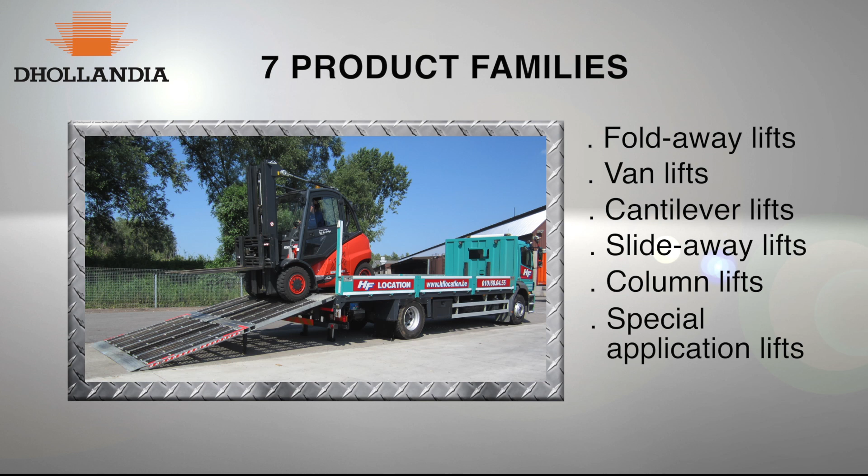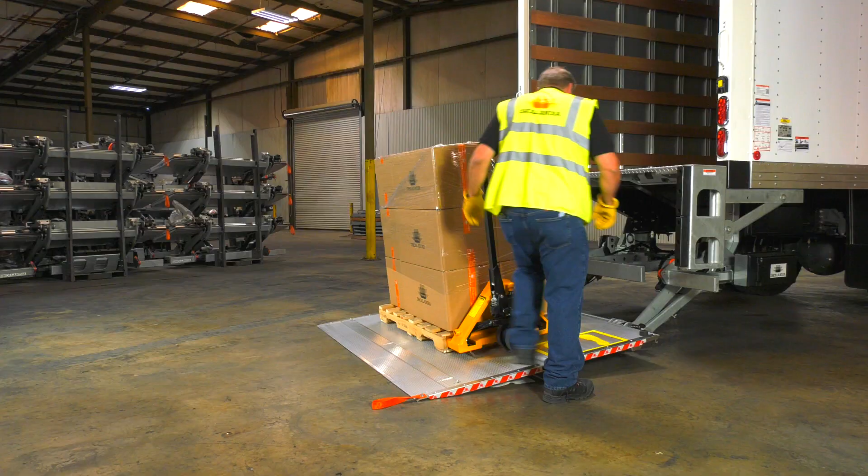This video addresses the fold-away lift type DHR with level ride and automatic tilt at ground level. The purpose of this video is to familiarize you with its main features, important safety precautions for liftgate operation, and the correct operation procedures. The presentation is broken down into 3 parts.

Section 1, introduction of the DHR and its main features. Section 2, important safety issues to be considered before and during use of the liftgate. And Section 3, correct operation of the DHR.

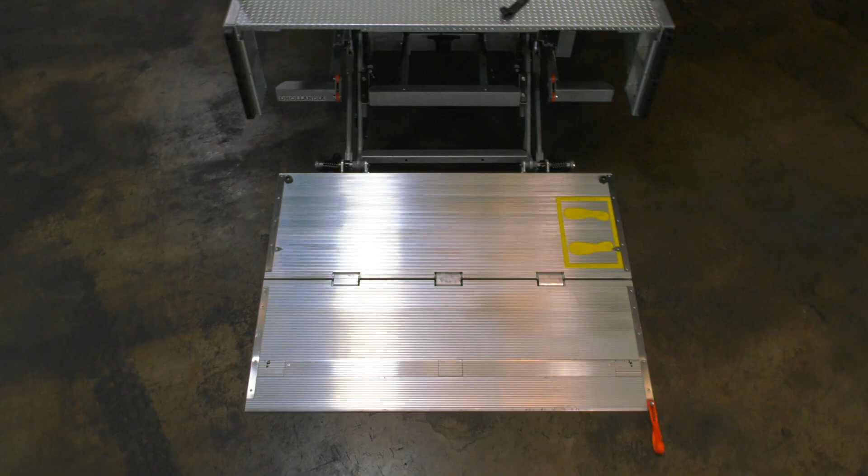DHR fold-away liftgates feature a folding, 2-piece platform consisting of a steel or aluminum platform main section and a lightweight aluminum flip-over part. In travel position, this foldable platform is safely stowed underneath the vehicle body. Upon deployment, the platform and lifting mechanism are lowered to the ground by means of the electric controls. Then the platform main section and flip-over part are unfolded manually.

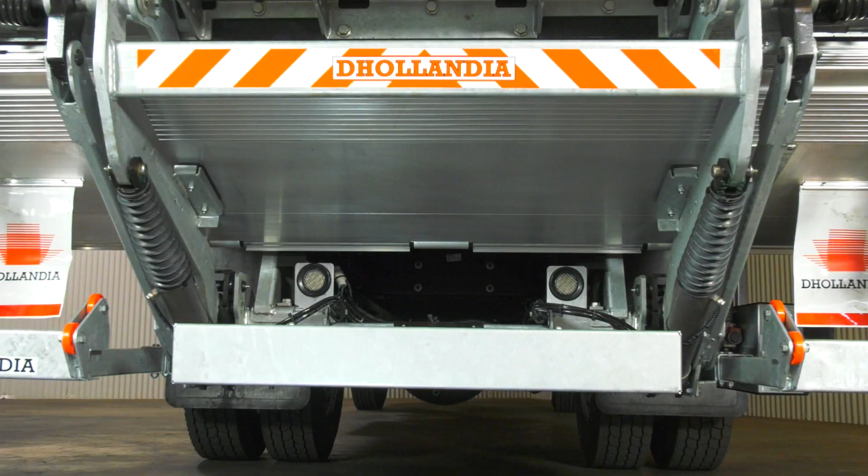Fold-away lifts can be installed in 2 ways: 1, flush with the rear sill of the vehicle body, or 2, under a bed extension plate equipped with side steps and dock bumpers.

The platform is moved up and down by heavy-duty lift arms, 1 or 2 hydraulic lift cylinders, and 2 parallel arms. They are mounted to a main lift frame that attaches to the vehicle chassis by means of a pair of mounting plates. Liftgates type DHRC are equipped with 1 centrally mounted lift cylinder.

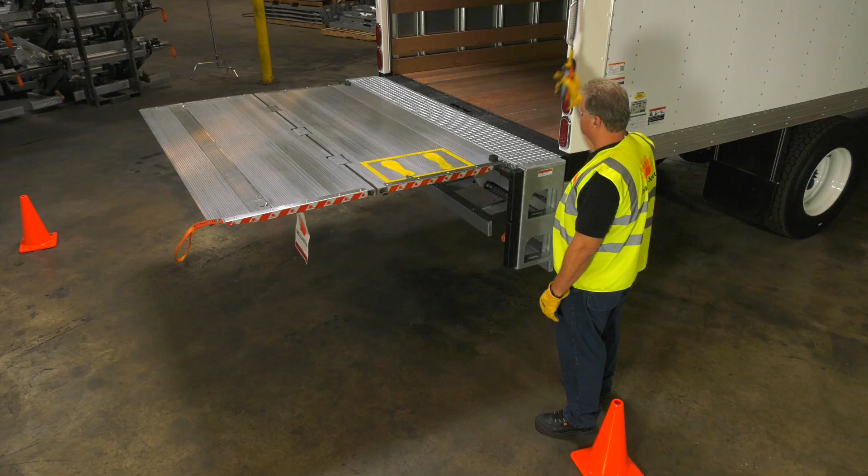Liftgates type DHRM have 2 lift cylinders mounted on the left and right side of the chassis rails. Depending on options chosen, the descend can be gravity down or power down.

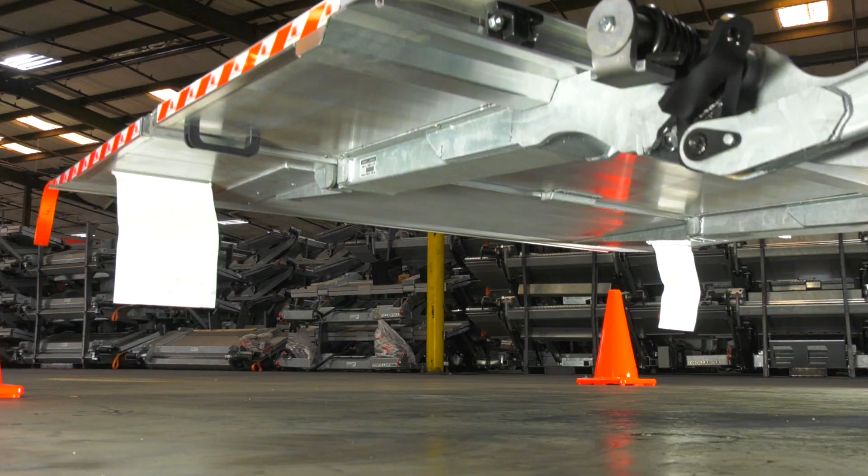The DHR are designed as level ride platforms with a repeatable auto tilt function at ground level. When the platform goes down and arrives at the ground, it will tilt down automatically as the operator continues to press the down button. When pressing the up button to lift the platform off the ground, it will first tilt itself up to the level ride position. Then the platform will continue to lift level ride to the vehicle floor.

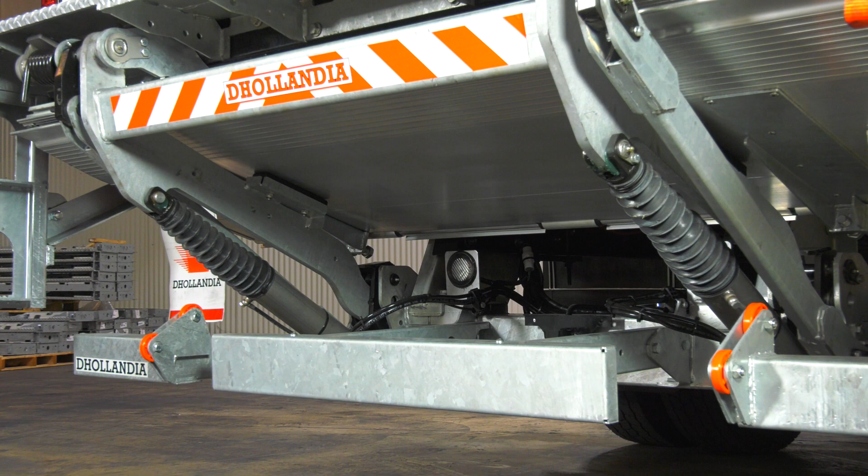Now have a closer look at the hydraulic cylinders. Each of the lift cylinders is equipped with automatic safety lock valves that automatically unlock and lock as the electric controls are activated or released.

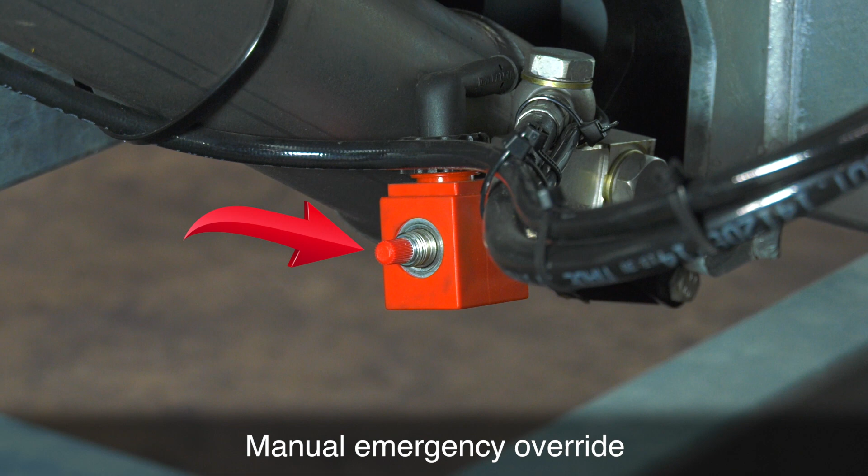The lock valves used on Dhollandia liftgates feature a manual emergency override so that they can be operated in case of electrical failure. Consult the operation manual before using this feature.

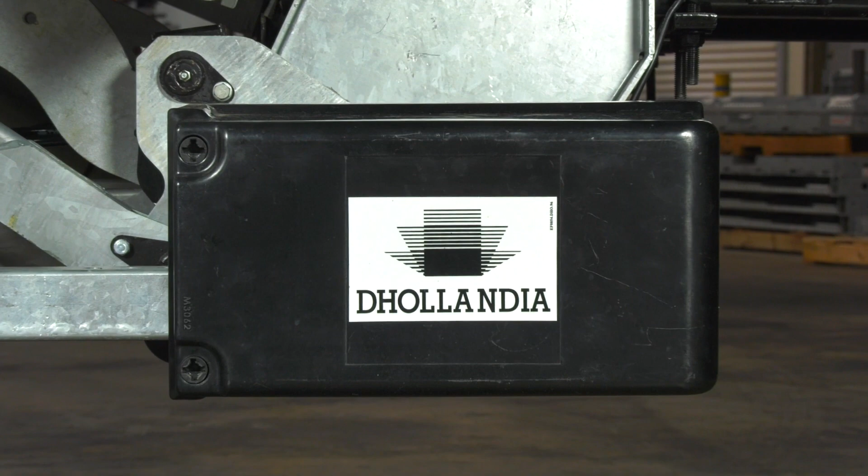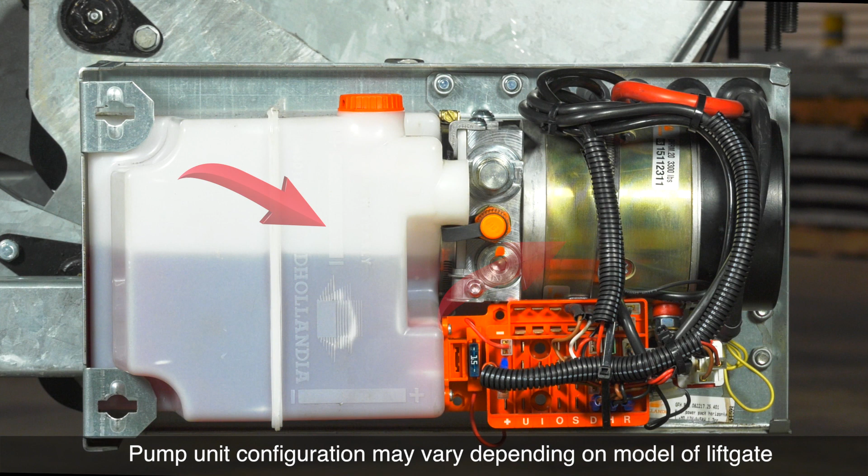The cylinders are driven by hydraulic pressure generated by the pump unit, generally pre-mounted at the side of the main lift frame. Inside, you will find a starter solenoid, electric motor, hydraulic pump, oil reservoir, and a wiring block connecting the whole system. For liftgates with optional power down function, an additional 4-way valve is mounted at the back of the pump unit.

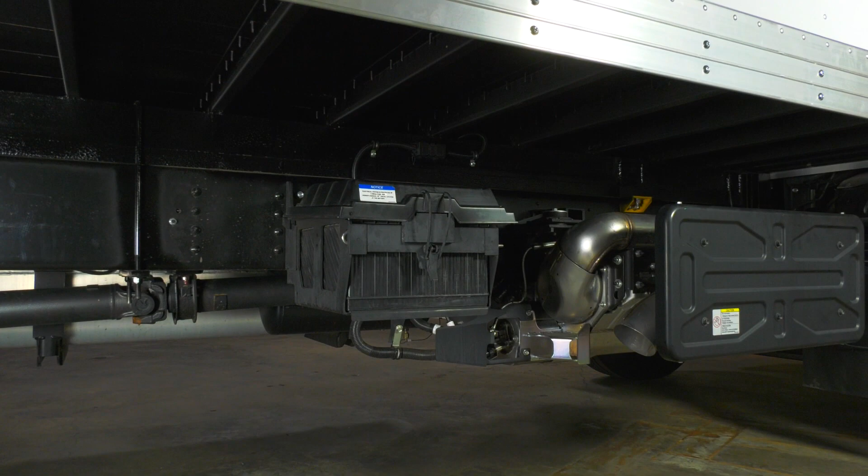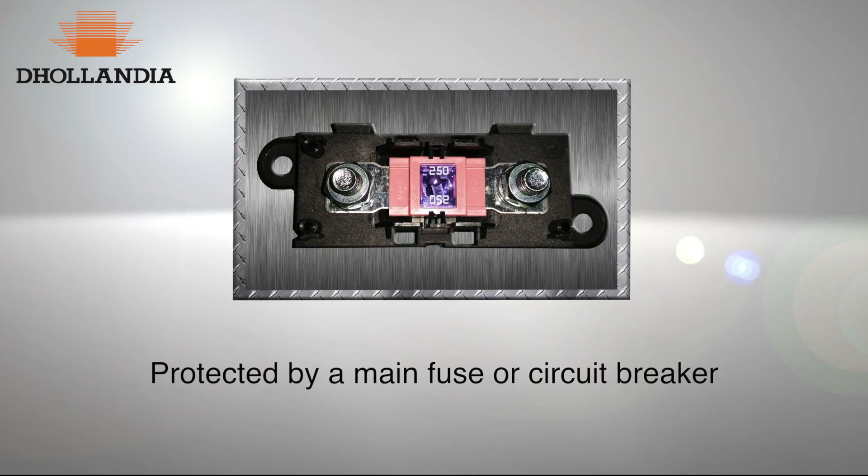The electric motor is fed by the truck batteries or an auxiliary battery pack charged by the alternator of the truck or tractor unit. The power cable from these batteries to the pump unit is protected by a main fuse or circuit breaker. These can cut out if the liftgate is run too many cycles without recharging the battery. It is harmful for any brand or type of liftgate to run on insufficient battery power.

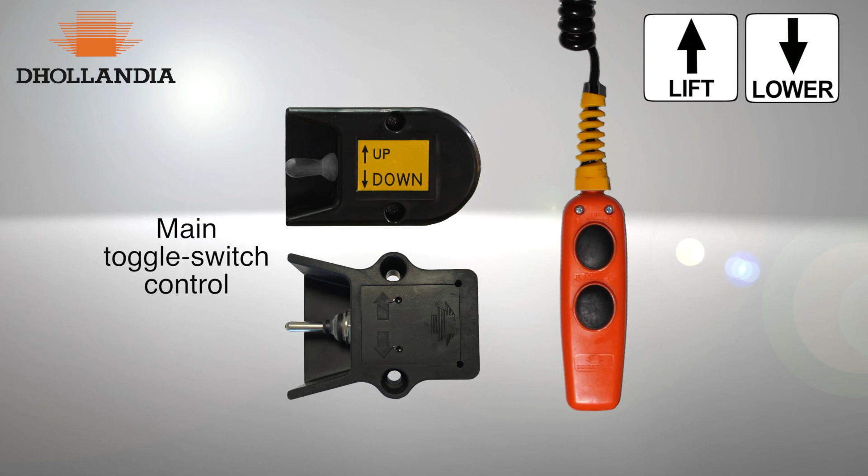Most liftgates are equipped with a main toggle switch control and auxiliary controls. The main toggle switch control is usually mounted here, on the side of the vehicle body, or here, on the vertical post of the vehicle body. When mounted on the side, it should only be accessed when standing on the ground.

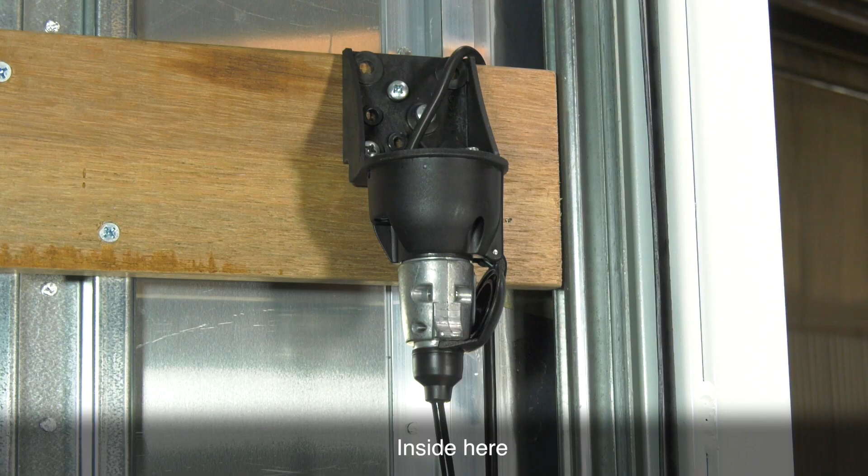The most popular auxiliary controls include a handheld control with spiral cable plugged in here, or foot controls mounted in the platform surface. All controls are powered by a cutoff switch mounted in the vehicle cabin. This cabin switch is activated by pressing the red button like this. A warning light indicates that power to the lift is switched on. It is shut off by pressing the button again like this.

Other popular options include automatic or manually operated cart stops, which prevent wheeled goods from rolling off the outboard platform edge.

All Dhollandia lift gates are supplied with an operation manual. This manual should be kept with your vehicle. All manuals can be downloaded from www.dhollandia.com. Additional paper copies can be ordered from Dhollandia via the relevant area number.

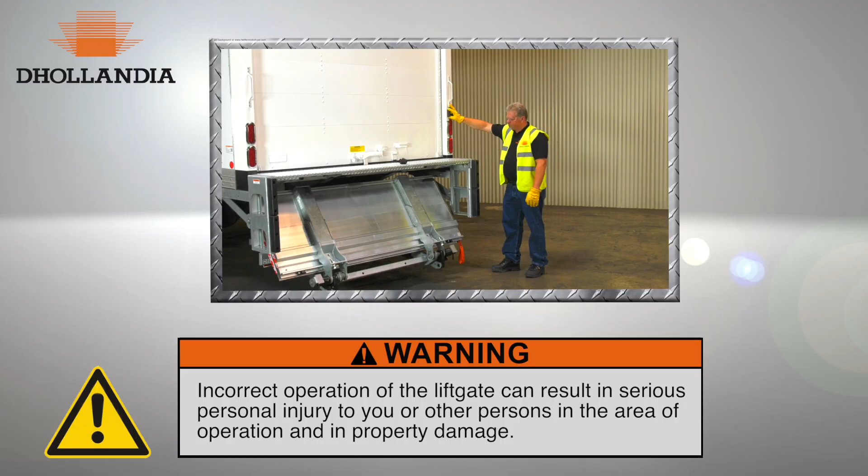This video is just a quick start guide to proper and safe work procedures. It is essential that you read and fully understand the operation manual and its safety precautions before operating the liftgate. Incorrect operation of the liftgate can result in serious personal injury to you or other persons in the area of operation and in property damage. It is your responsibility to ensure you comply with all warnings and operating instructions in the operation manual.

Never allow untrained or unauthorized persons to operate the liftgate. Dhollandia recommends you wear professional safety toe footwear with a good non-slip sole, protective gloves, and eye protection.

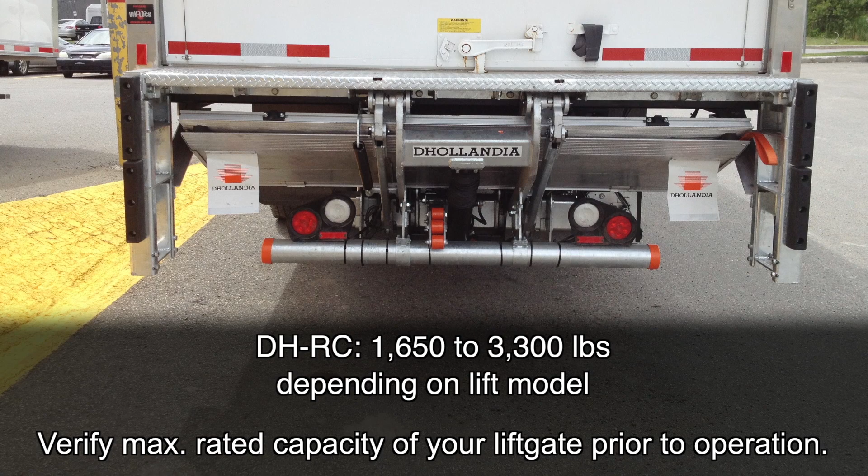Depending on the lift model, Dhollandia offers 1,650 to 3,300 pounds maximum rated capacity on the DH-RC with one lift cylinder, and 2,200 to 5,500 pounds maximum rated capacity on the DHRM with two lift cylinders.

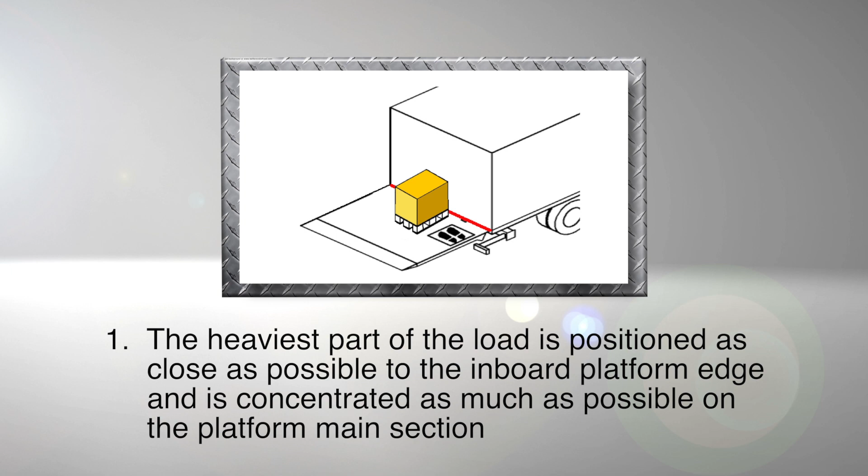This value is the maximum load you are allowed to put on the platform under the following two conditions: the heaviest part of the load is positioned as close as possible to the inboard platform edge and is concentrated as much as possible on the platform main section, and the load is centered between the lift arms.

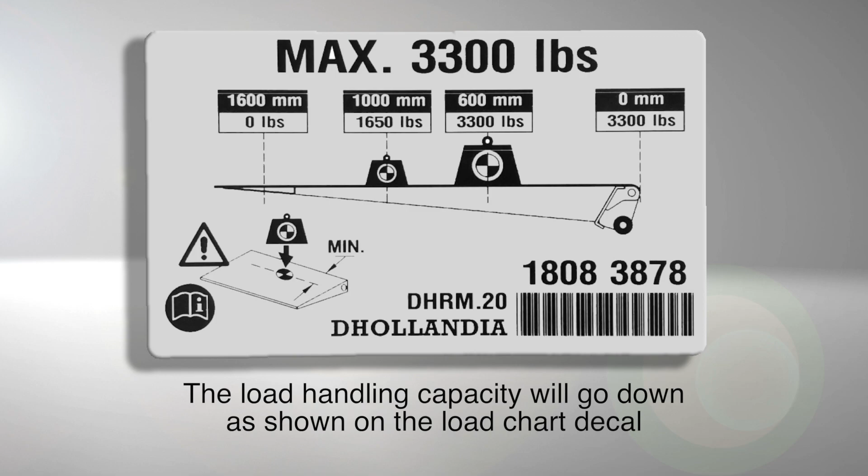If you place the load further away from the rear of the vehicle or out of center, the load handling capacity will go down as shown on the load chart decal. There are marks on the platform here and here to indicate where the center point of maximum load and area of greatest strength is located.

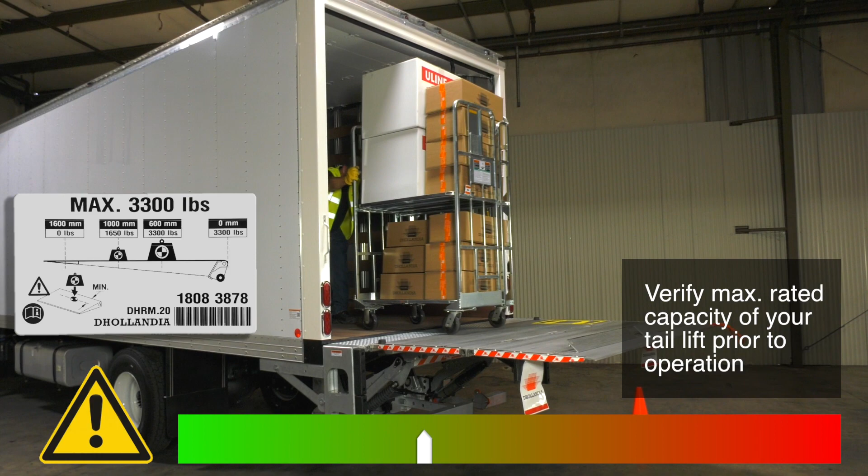Never place a load on the platform that exceeds the rated capacity and load charts. Overloading can damage the liftgate and cause severe personal injury to the operator and other persons in the working area. The load should never protrude beyond the outboard edge or side edges of the platform.

Forklifts are a frequent source of accidents and severe damage. When loading or unloading the vehicle by forklift, keep the platform safely stowed under the vehicle chassis. Never drive a forklift onto the platform.

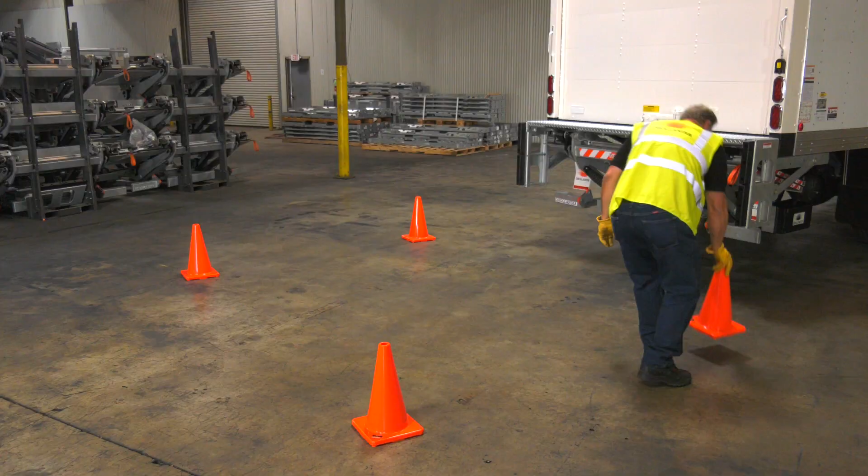Check that the work area is clear and make sure the liftgate can be used safely. Keep visual control over the whole work area at all times. It is good practice to place safety cones at the corners of the work area.

Don't allow any other person near the liftgate or its platform while it is in use. Optional platform flags can help make the liftgate more visible to other persons. Be prepared to guide other persons away from your work area.

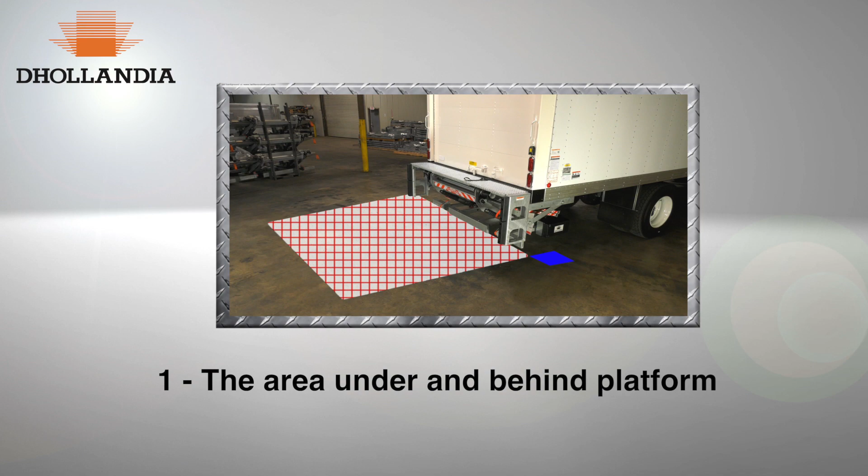There are 4 main danger zones that must be avoided at all times. First, the area under and behind the platform. Stay clear of the range of motion of the platform and the moving parts of the liftgate at all times.

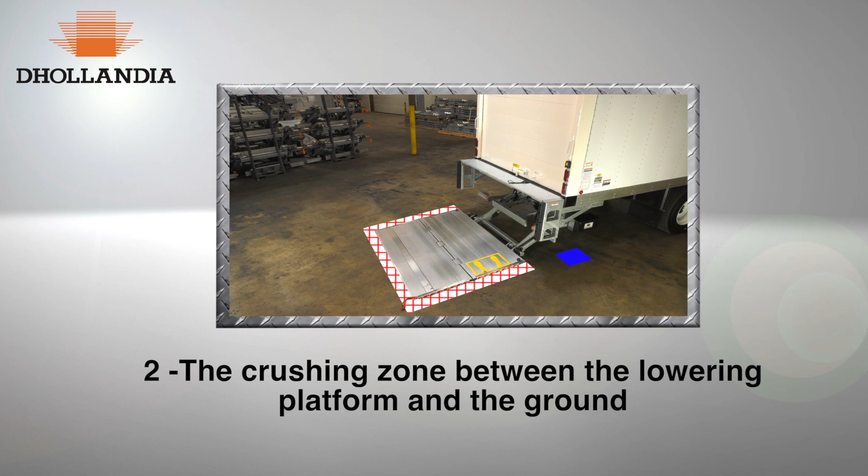Second, the crushing zone between the lowering platform and the ground. Stand at a safe distance on the side of the vehicle while operating the liftgate from the ground.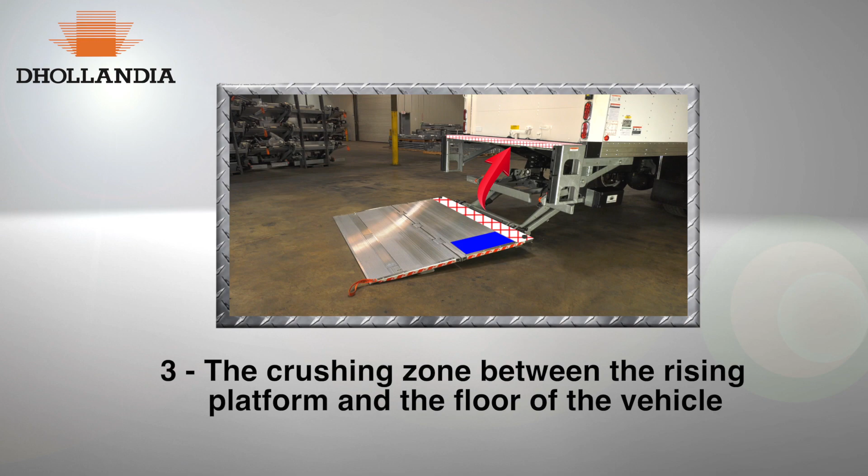Third, the crushing zone between the rising platform and the floor of the vehicle. Keep your feet at a safe distance of minimum 10 inches away from the inboard platform edge.

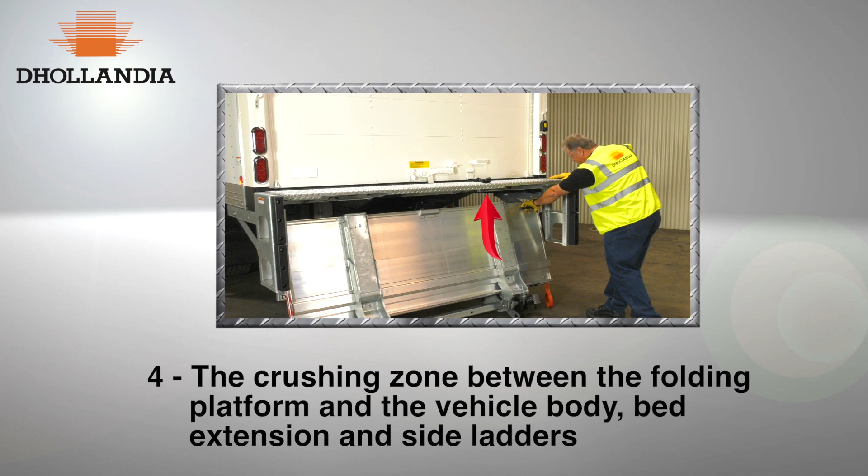Fourth, while manually folding and unfolding the platform, beware of the crushing zone between the platform and vehicle body, the inside faces of the bed extension and side ladders.

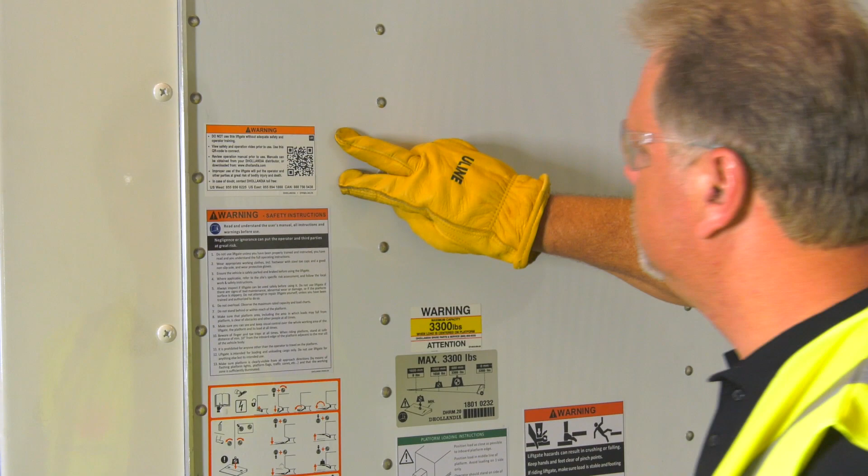Important decals are affixed near the main toggle switch control. Make sure that you fully understand and comply with these warnings prior to operating the liftgate, and keep them clean and legible at all times.

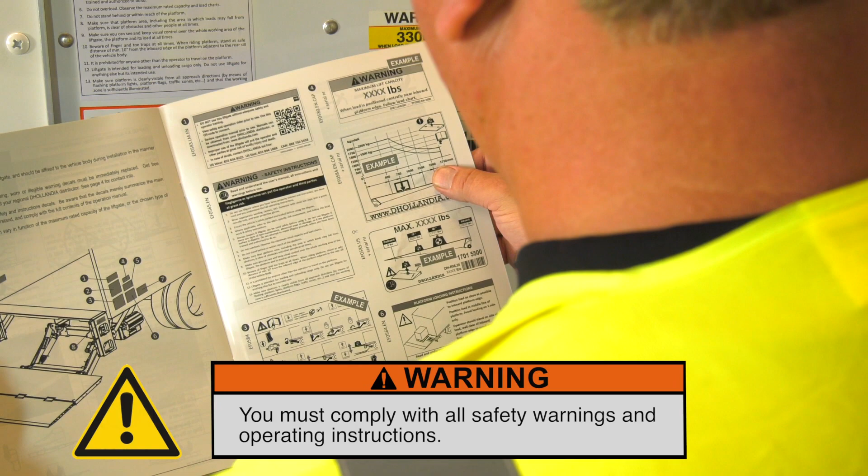Replacement decals and manuals can be obtained from Dhollandia via the relevant part number. You must comply with all safety warnings and operating instructions. Failure to do so can result in injury to you and others in the area of operation.

An extended platform is a potential hazard for people or vehicles passing by. Always make sure the liftgate is fully stowed whenever it is not in use. And before moving your vehicle, first stow the platform in its travel position.

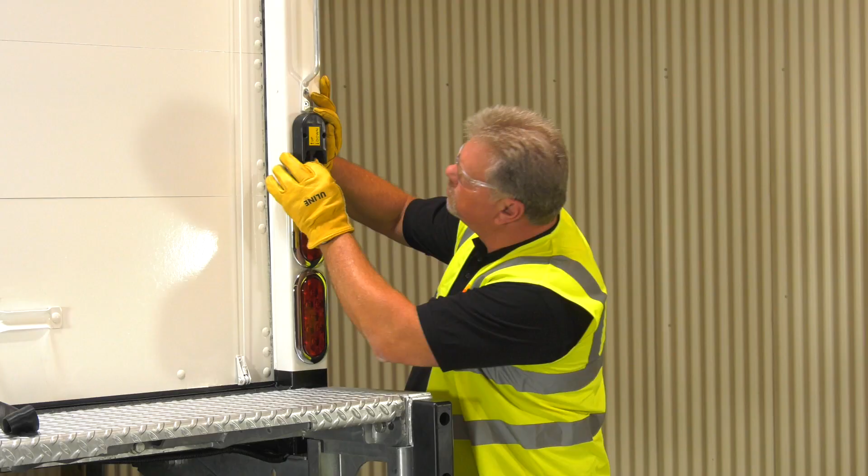Before operating your liftgate, there are some daily checks that must be performed. Begin your inspection at the main toggle switch control. Check the overall condition of the control box and its switch, and verify if the switch swiftly returns to the neutral position after releasing it.

Make sure the cabin switch switches the electric power on and off according to the set position. Check the overall condition of the auxiliary controls and their switches. In case of a handheld control, inspect the spiral cable.

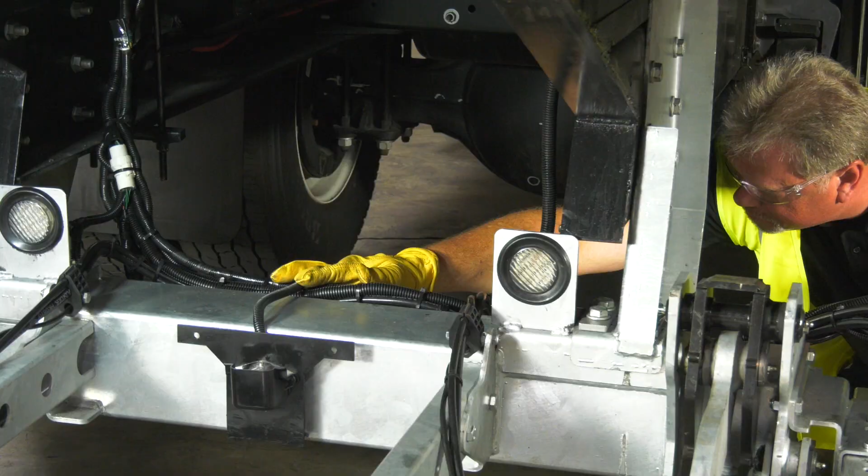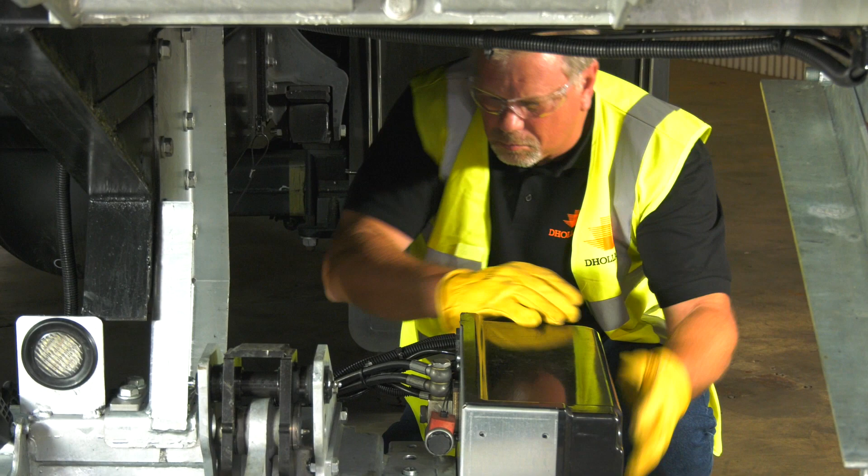Next, check the overall condition of the cabling to the pump unit. Make sure the looms and cables are not chafed or damaged. Check that the cover of the pump unit is properly mounted and secured, and look for visible oil leaks. Visually check all cylinders, their valves and fittings for visible oil leaks.

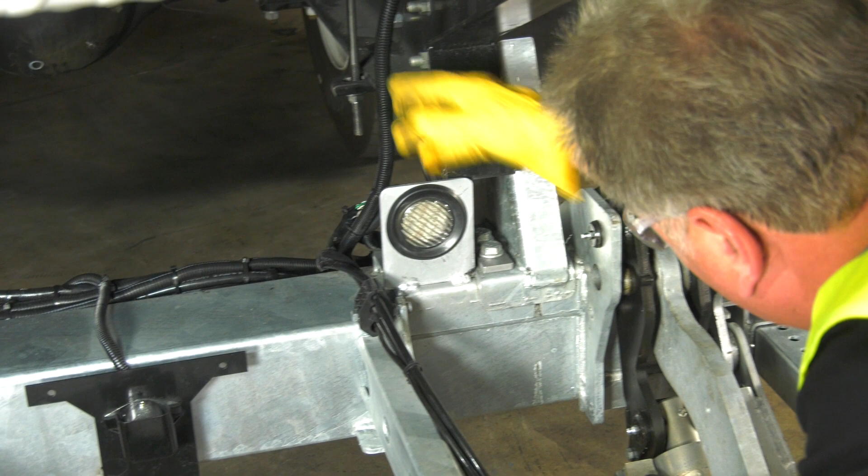Follow the hydraulic pipes and fittings to the pump unit. Make sure all wires and hydraulic pipes are undamaged and secured with cable ties. Check for visible oil leaks.

Visually inspect the general condition of the lift arms, lift frame, and its mounting plates to the vehicle chassis. Look for deformation, cracks in the material or welds, and proper locking of the pivoting pins. Ensure all bolts for the mounting plates to the vehicle chassis are fastened.

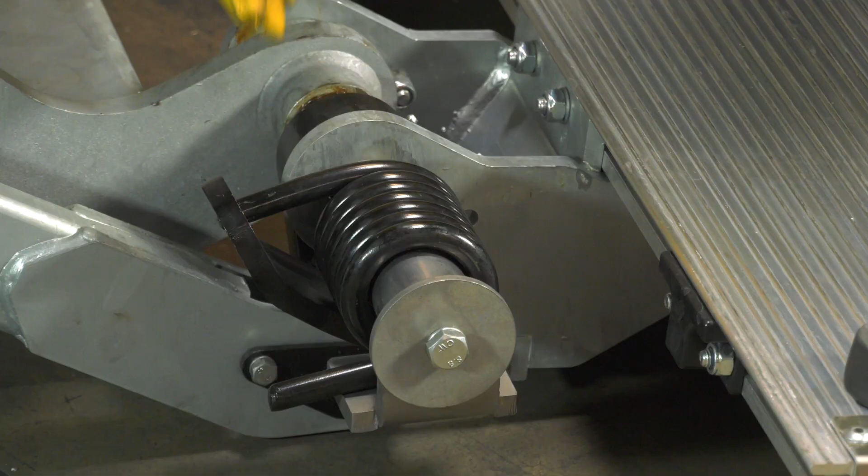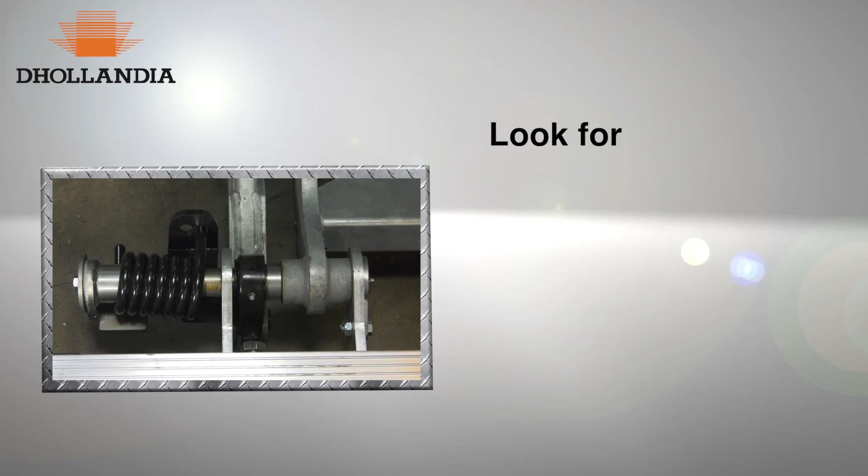Visually inspect the general condition of the platform opener and the springs used to assist the folding and unfolding of the platform. These springs can be mounted on the rear face of the platform or alongside the lift arms. Look for deformation and deterioration in the material or welds.

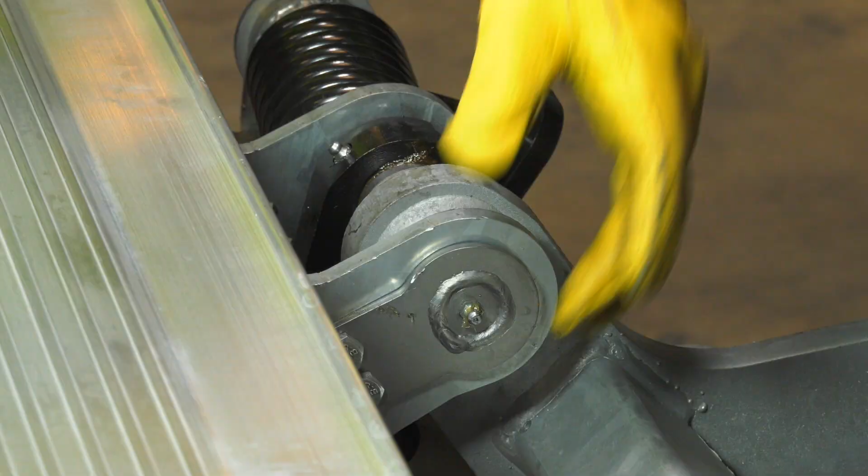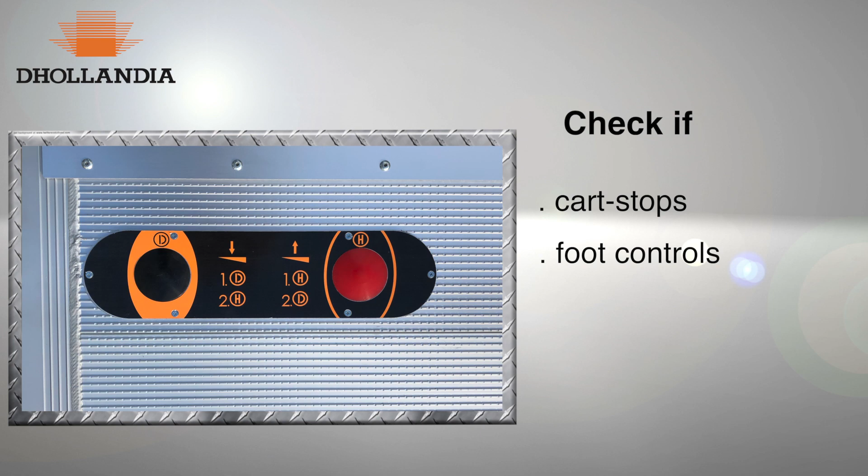Then inspect the general condition of the platform. Again, look for deformation, cracks in the material or welds, and proper locking of the pivoting pins, including the pin that joins the two platform sections together. Depending on options installed, check if cart stops, foot controls, safety rails, etc. are in good working order.

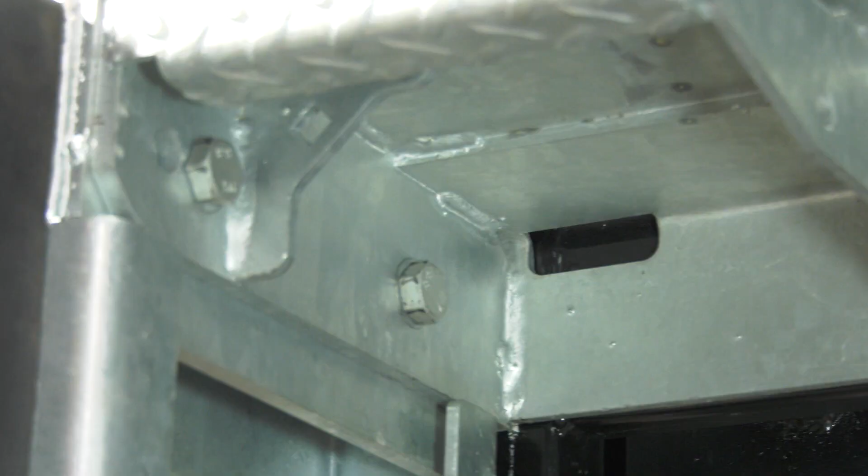Finally, inspect the general condition of the bed extension plate, the side steps, and dock bumpers. Look for deformation, cracks in the material or welds, and proper locking of all the mounting bolts. Make sure the surface of the platform and bed extension plate and the steps of the side ladder are clean. If they are covered with snow, mud, dirt, or slippery liquids, do not use the liftgate and clean it first.

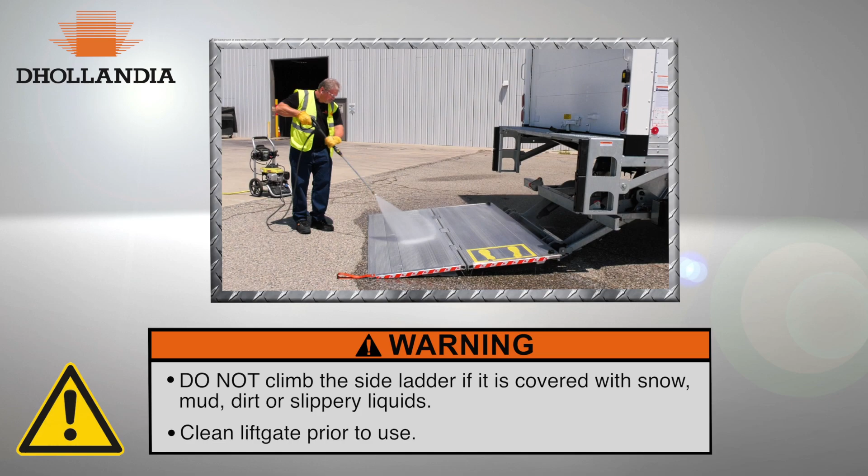A properly installed and maintained liftgate should operate smoothly and fairly quietly through its range of motion. Be alert to any unusual movements or sounds, such as scraping or squeaking noises, as well as sounds of the pump unit struggling or slowing down in an unusual manner. If you notice unusual movements or sounds, discontinue use of the liftgate and contact an authorized Dhollandia service agent for immediate repair. Affix the out-of-service decal to warn other people.

Make sure you hit the road with a liftgate maintained in safe operating condition. Remember, regular maintenance is very important for the reliability of the liftgate and for the safety of the operator and other persons near the liftgate.

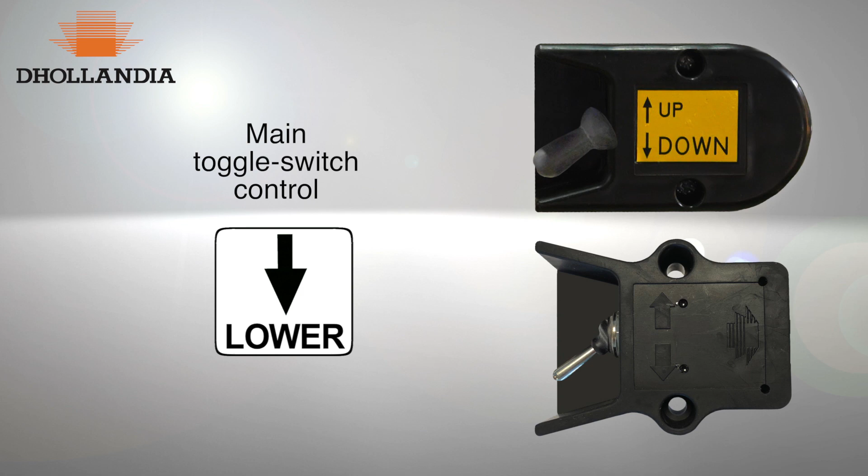Before operating the liftgate, let's first focus on how to use the control units. The main toggle switch control is operated like this to lower the platform, or like this to lift the platform. When mounted on the side of the vehicle body, the toggle switch control should only be used while standing on the ground safely on the side of the liftgate.

When mounted on the vertical post of the body, the toggle switch control can be used from a safe position on the side of the liftgate at the ground, or from a safe position on the platform at a safety distance of minimum 10 inches away from the inboard platform edge.

The auxiliary controls can only be used when the platform is fully deployed. The remote control with spiral cable is operated like this to lift the platform, like this to lower the platform. Whenever operating these controls from a position on the platform, make sure you stand at a safety distance of minimum 10 inches from the inboard platform edge.

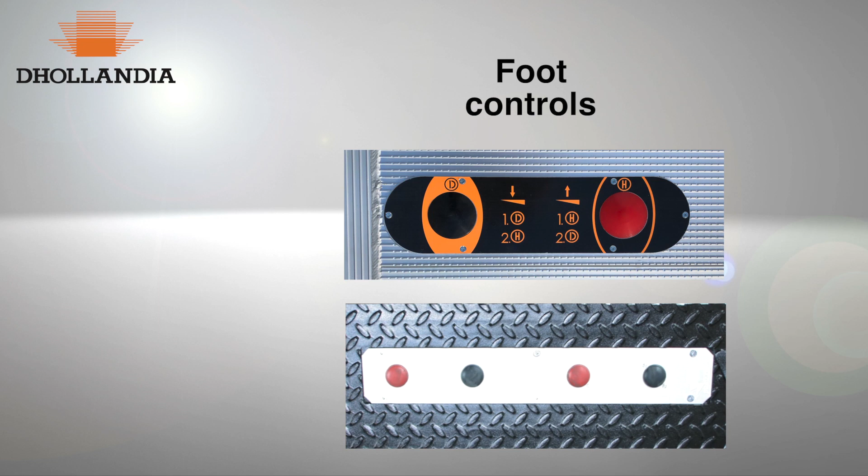The platform-mounted foot controls are operated like this to lift the platform, like this to lower the platform. If your liftgate is equipped with a different style of control, consult the operation manual or consult your local Dhollandia distributor prior to using the liftgate. Whenever traveling on the platform, make sure your footing is stable and maintain 3 points of contact.

Next, let's look at how the liftgate operates. We will do a run-through with an empty platform first, then add a load sequence to that.

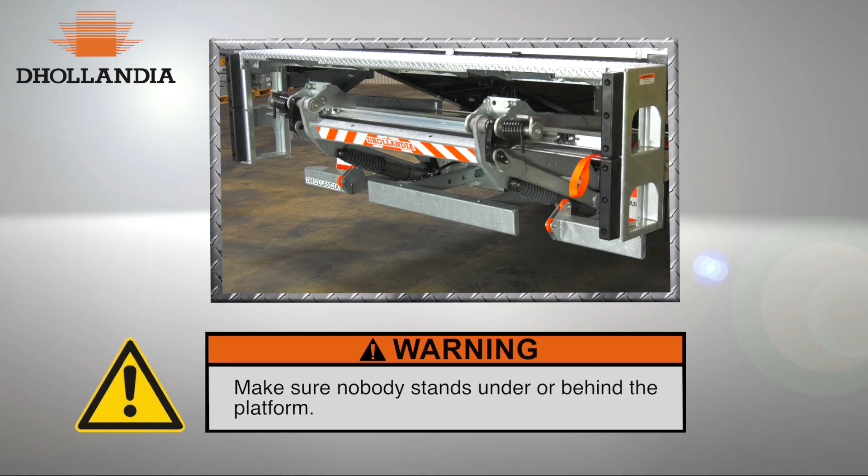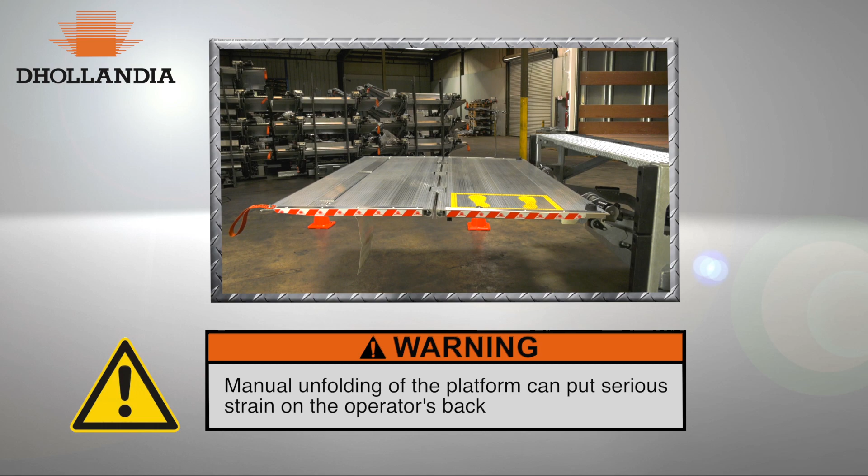The platform opener will rotate the platform to a fairly vertical position that makes it easier to manually unfold the platform. Depending on installation settings and maintenance, the manual unfolding of the platform can put strain on the operator's back. To avoid injury, seek 3 points of support to unfold the platform. Rest your free hand, not used to grab the platform handle, on the outside of the bed extension plate for additional support.

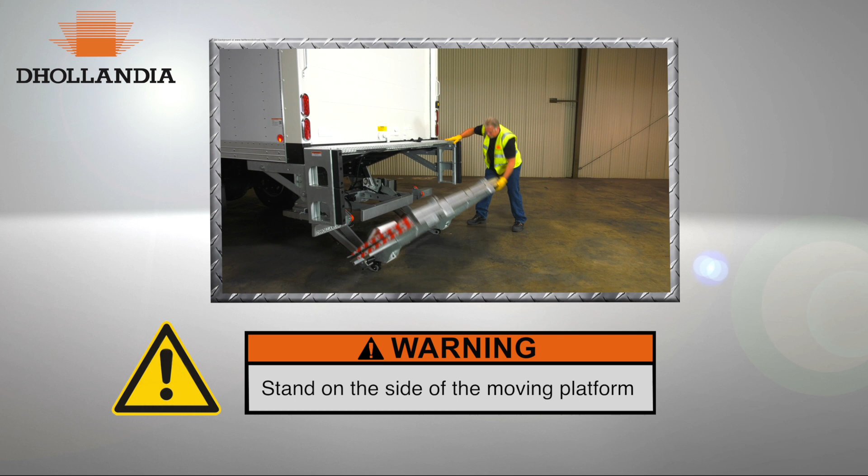Now pull the complete folded platform back into horizontal position. Make sure you stand on the side of the platform and keep your hands clear from the underside of the vehicle body, the bed extension plate, and the side steps. Finally, manually unfold the flip-over point 180 degrees outward. The liftgate is now ready for use.

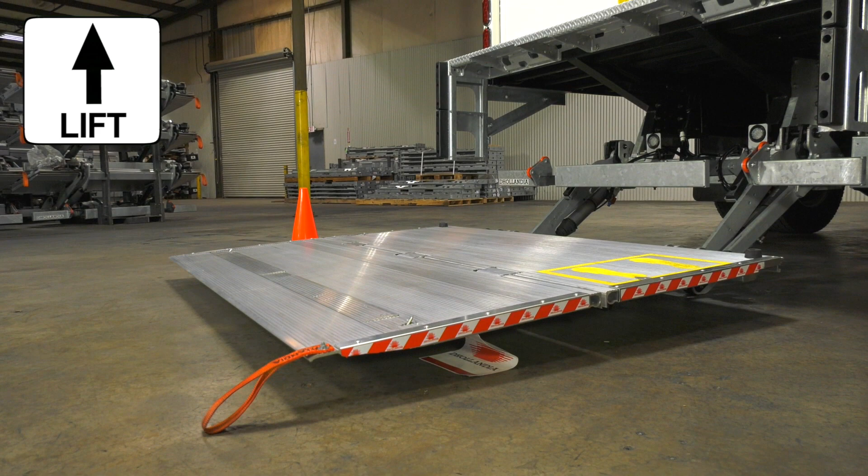To raise the platform to the vehicle floor, use the lift function of the main toggle switch control or the auxiliary controls. The platform will first tilt up to the level ride position. Then it will continue to raise level ride to the vehicle floor. Release the switch as you hear the hydraulics turn in over pressure.

To lower the platform, press the lower function of the main toggle switch control or the auxiliary control. The platform will go down level ride until it reaches the ground. Then it will tilt down if the operator continues to press the lower button.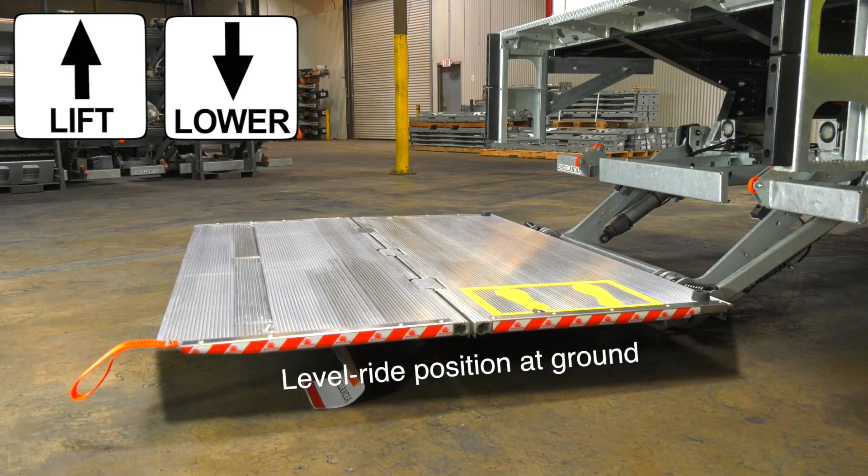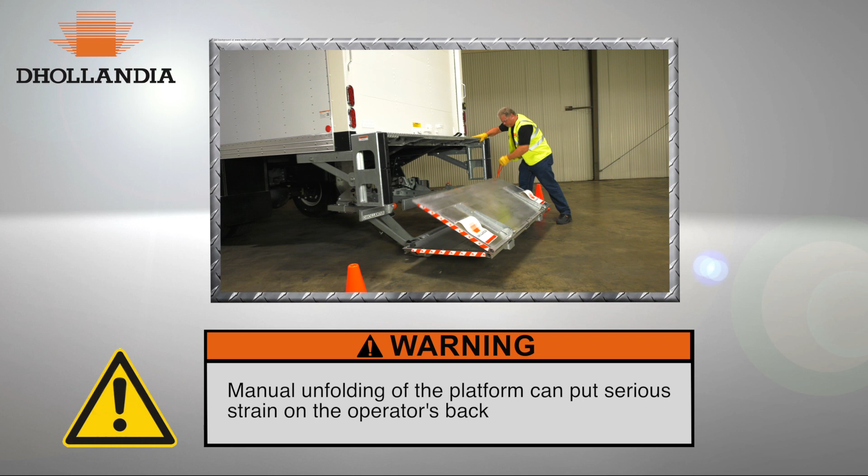Finally, to stow the platform back in its travel position, start with the platform in level ride position just at the ground. Fold the flip-over point back onto the platform main section. Again, the manual folding of the platform can put serious strain on the operator's back.

Seek 3 points of support to avoid back injury. Rest your free hand, not used to grab the platform handle, on the outside of the bed extension plate for additional support. Manually lift up and rotate the platform against the platform opener. Stand on the side of the platform and keep your hands clear from the underside of the vehicle body, the bed extension plate, and the side ladders.

Use the function lift to raise the folded platform against the underside of the bed extension plate or vehicle body. Release the switch as you hear the hydraulics turn in over pressure.

If you were using the handheld control with spiral cable, stow the control gently. Switch off the electrical power by pushing the cutoff switch in the truck cabin.

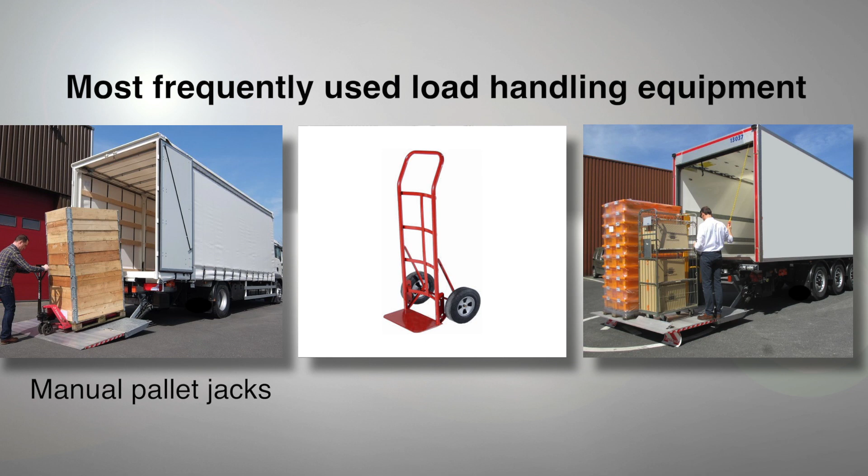Let's look at loading and unloading again, starting from the open platform at vehicle bed height. Most frequently used load handling equipment on fold-away liftgates include manual pallet jacks, hand trucks, and carts.

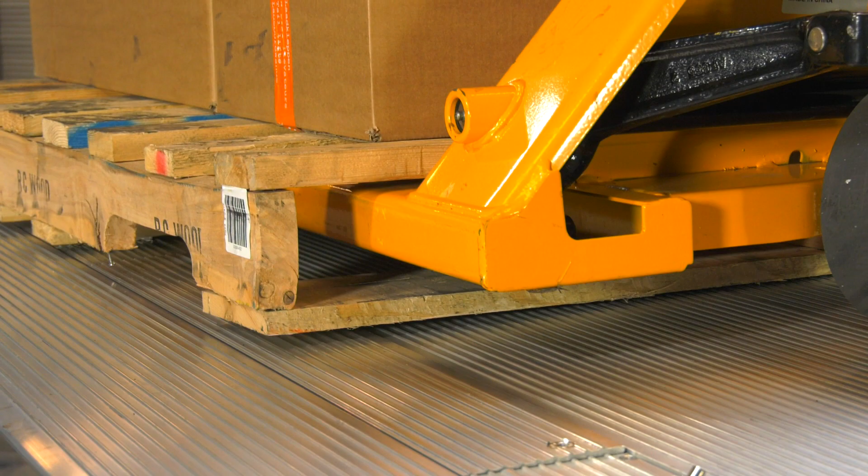When handling pallets, lower them down on the platform surface to prevent the pallets from shifting or rolling off the platform unintentionally. Carts or other wheeled loads must be secured on the platform by other means. Deploy the cart stops on your platform prior to pushing the load from the cargo space onto the platform.

For automatic cart stops, use the tip of your shoe to kick the lever outward. Dhollandia offers optional cart stops in different variations. If your liftgate is equipped with a different style of cart stop, consult the operation manual or the additional videos on the Dhollandia website. Now push the load onto the platform.

Push it out far enough for clearance to go down, but keep the heaviest part of the load as close as possible to the inboard platform edge to comply with applicable load charts. Always push the load from the vehicle floor onto the platform. Pulling the load from the vehicle can result in a fall from the platform and serious injury.

Check again visually that nobody or nothing has come into your work area. Then use the auxiliary controls to lower the platform to the ground.

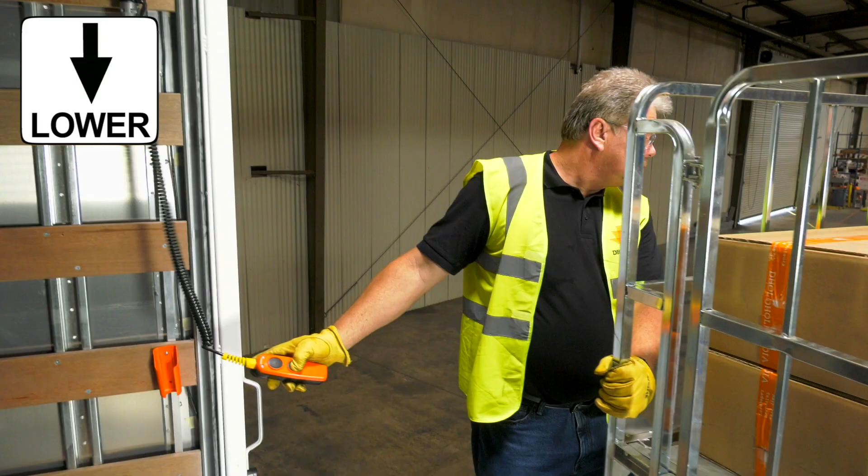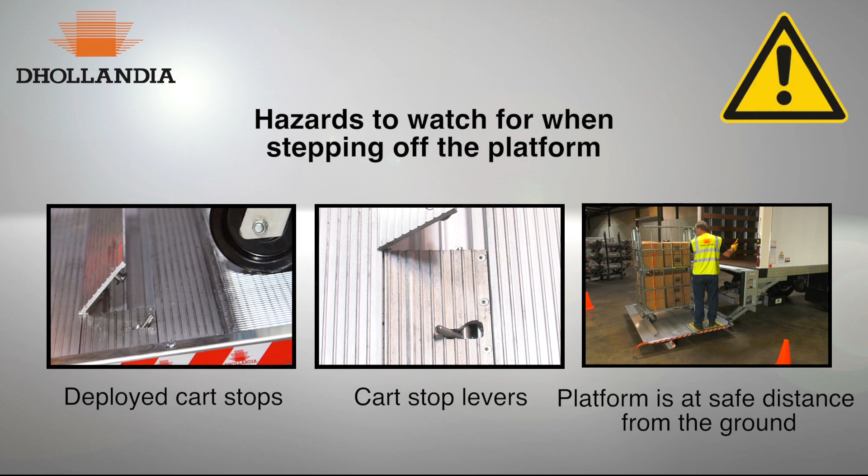Hazards to watch for when stepping off the platform are deployed cart stops, cart stop levers, and if the platform is at a safe distance from the ground. While traveling up or down, stand on the side of the load, never in front or behind. Make sure your footing is stable and always maintain 3 points of contact.

Keep the down button pressed to allow the platform to tilt to the ground. If you have deployed the optional cart stops, now is the time to stow them again. When offloading, make sure the lever is oriented forwards. Then simply step on the cart stop and make sure the lock lever moves back to the locked position.

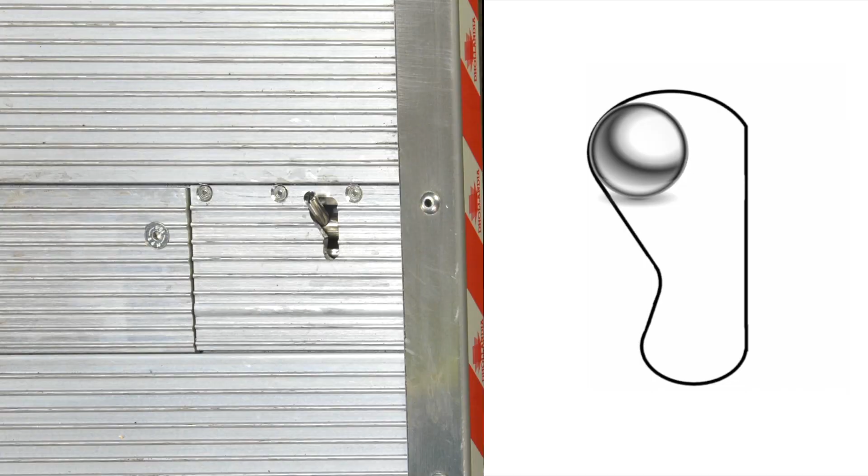When loading from the ground onto the platform, there are 2 modes to operate the automatic cart stops. When pushing the lever just to the side, the flap will remain closed after you step on it or ride a cart over it. When pushing the lever to the side and to the rear, the flap will jump up again to open position after the cart's rollers have passed over it.

So, while the platform lays tilted down at the ground, roll the load on the platform. Use the lift function of the auxiliary controls to raise the platform from the tilted position to the level ride position, and further raise the platform to the vehicle floor.

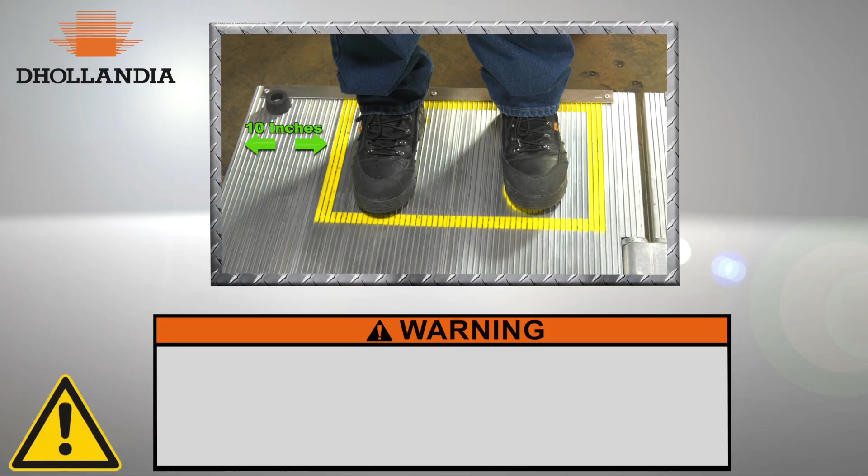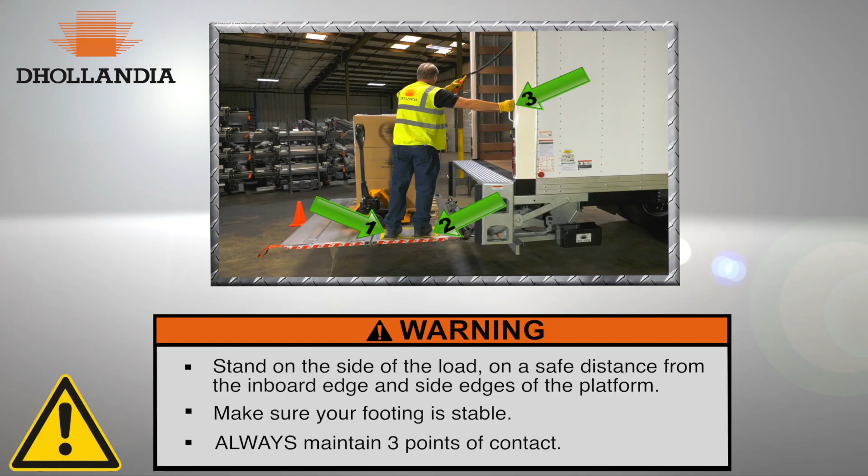Remember to stand on the side of the load, at a safe distance from the inboard edge and side edges of the platform. Make sure your footing is stable and always maintain 3 points of contact. At the vehicle floor, release the lift button as you hear the hydraulic system go in over pressure.

Carefully move the load inside and secure it per your company policy. When loading and unloading at a loading dock, always keep the platform securely stowed in its travel position to avoid damage. And always reverse slowly to avoid heavy impact and damage to the liftgate.

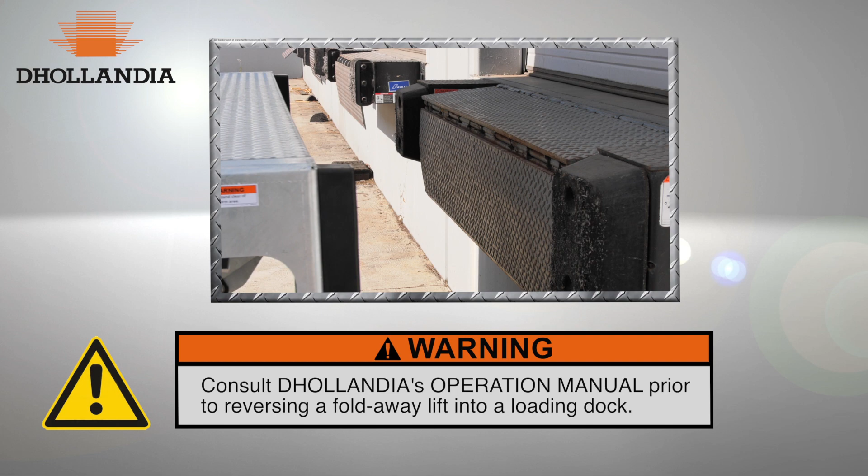We wish you a safe journey and trouble-free use of your Dhollandia liftgate. And remember, make sure you read and apply all safety precautions and work instructions from the operation manual. Contact Dhollandia in case of doubt prior to continuing.